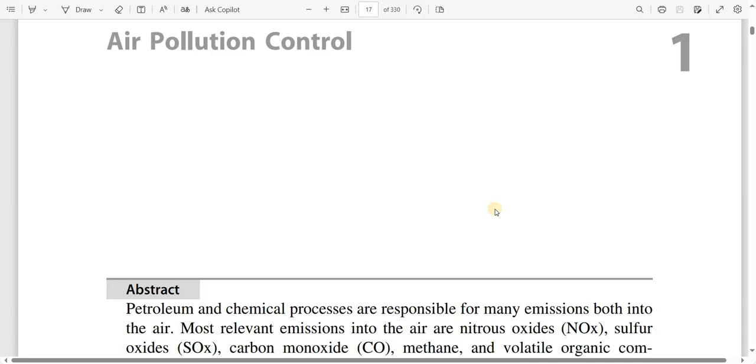From today onwards, we'll be learning about air pollution control - how we can control air pollution in some industries or in chemical plants especially. As a chemical engineer, if we talk about pollution, we would really go to the next level in our life. So we'll be learning air pollution control one page a day, or one topic a day.

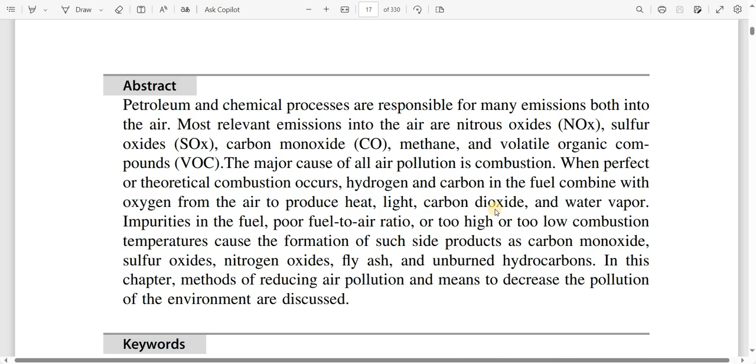Let's see however we take this topic. Let's say abstract: petroleum chemicals. Most of this I'll be just explaining, or reading from this book, so try to understand from that. Petroleum and chemical processes are responsible for many emissions into air.

Most relevant emissions into air are nitrous oxide (NOx), sulfur oxide (SOx), carbon monoxide, methane, and volatile organic compounds (VOC). So most of the emissions that take place are nitrogen based oxide and sulfur based oxide and carbon monoxide, along with methane and volatile organic compounds.

The major cause of all air pollution is combustion. When perfect or theoretical combustion occurs, hydrogen and carbon in the fuel combine with oxygen from the air to produce heat, light, carbon dioxide, and water vapor. Impurities in the fuel, poor fuel to air ratio, and too high or too low combustion temperature cause the formation of side products such as carbon monoxide, sulfur oxides, nitrogen oxides, fly ash, and unburnt hydrocarbons.

In this chapter, methods of reducing air pollution, meaning to decrease pollution of the environment, are discussed. It's a beautiful chapter. Air pollution is the contamination of air by noxious gases and minute particles of solid and liquid matter, particulates, in concentration that endangers health. In this condition, air is contaminated by a foreign substance and the substance themselves.

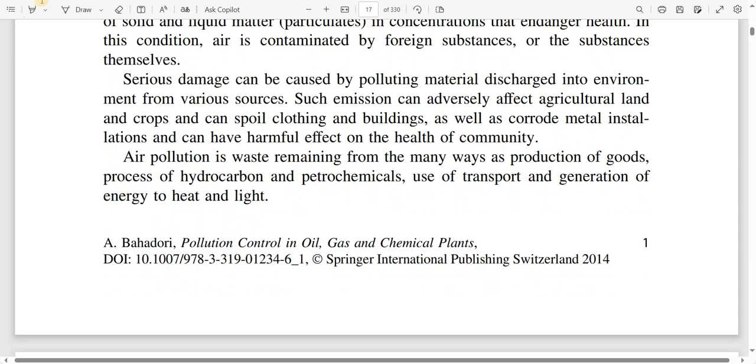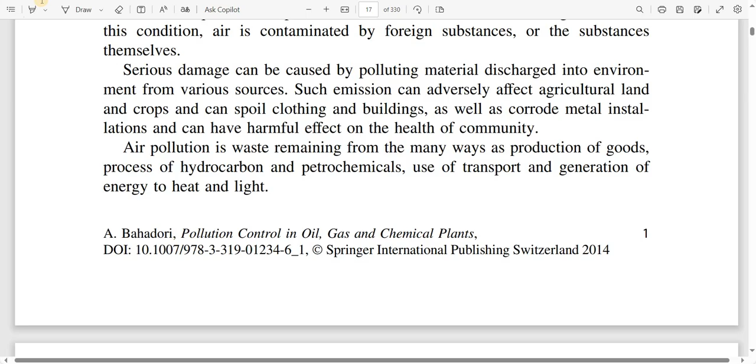Serious damage can be caused by polluting material discharged into the environment from various sources. Such emissions can adversely affect agricultural land and crops, can spoil clothing and buildings, as well as corrode metal installations, and can have harmful effects on the health of the community.

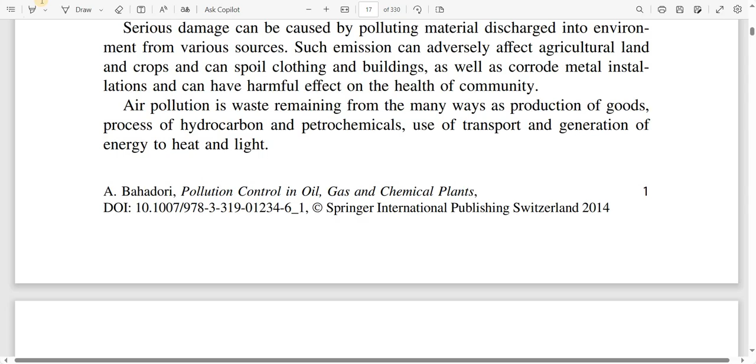Air pollution is waste remaining from many activities such as production of goods, processing of hydrocarbons and petrochemicals, use of transport, and generation of energy for heat and light. Air pollution consists of gaseous, liquid, or solid substances that, when present in sufficient concentration for a sufficient time and under certain conditions, tend to interfere with human comfort, health, or welfare and cause environmental damage. Air pollution causes acid rain, ozone depletion, photochemical smog, and other such phenomena.

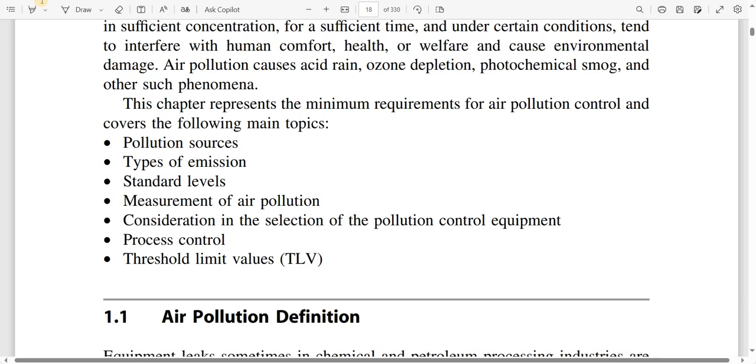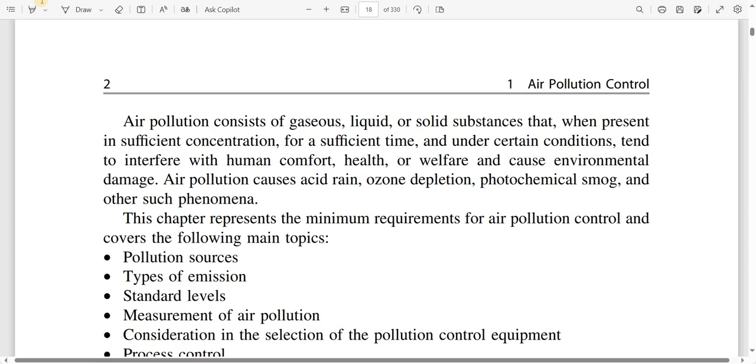This chapter represents the minimum requirements for air pollution control and covers the following topics. So what we have understood is air pollution can affect different parts of a chemical plant, like the health of a human being, or the area in which the air exists, or it can also pollute water that comes as rain, and it can also deplete ozone and cause other photochemical smog and phenomena. These are the main topics we'll be studying here.

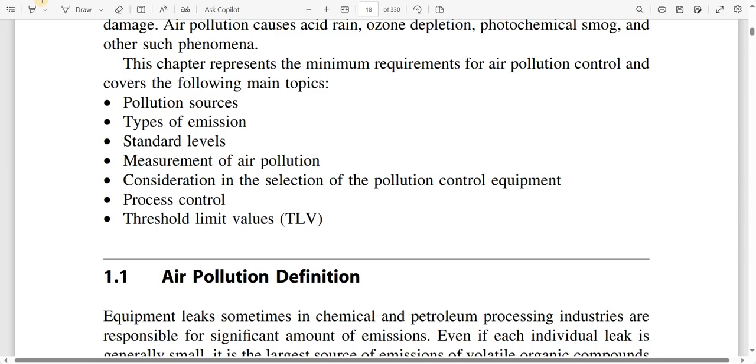They are: pollution sources - what are the sources of pollution; types of emissions; standard levels - what standard levels of a chemical industry should be implemented during installation of plants; measurement of air pollution; consideration in the selection of pollution control equipment; process control; and the last one is threshold limit values, also known as TLV.

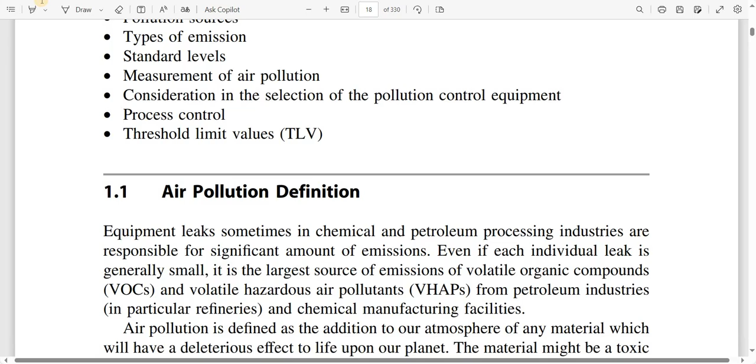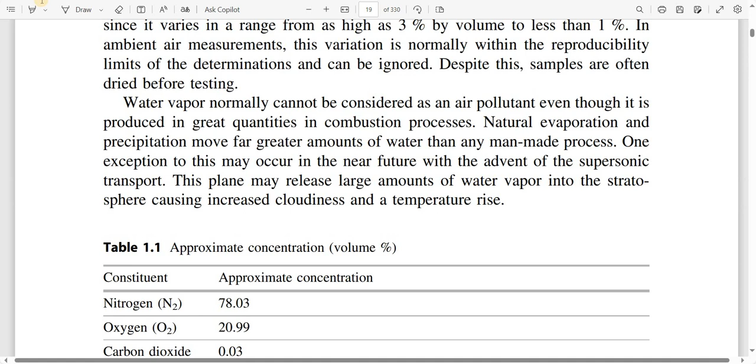So let's today learn about air pollution definition, and see how much we can finish. This concentration level we can do tomorrow also. So this is the final topic for today: air pollution definition. What is air pollution, by the way?

Equipment leaks, sometimes in chemical and petroleum processing industries, are responsible for a significant amount of emission. Even if each individual leak is generally small, it is the largest source of emission of volatile organic compounds (VOC) and volatile hazardous air pollutants (also known as VHAP) from petroleum industries, in particular refineries and chemical manufacturing facilities.

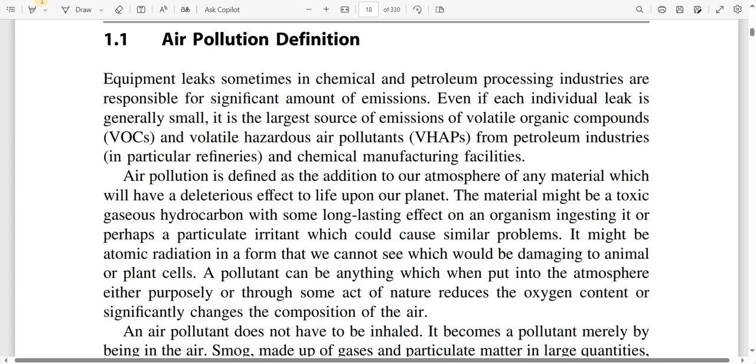Air pollution is defined as the addition to the atmosphere of any material which will have a deleterious effect on life upon our planet. The material might be toxic gaseous hydrocarbon with some long-lasting effect on organisms, ingesting it, or perhaps a particulate irritant which could cause similar problems. It might be atomic radiation, in a form we cannot see, which would be damaging to animal and plant cells. A pollutant can be anything which, when put into the atmosphere, either purposely or through some act of nature, reduces the oxygen content or causes significant changes to the air composition.

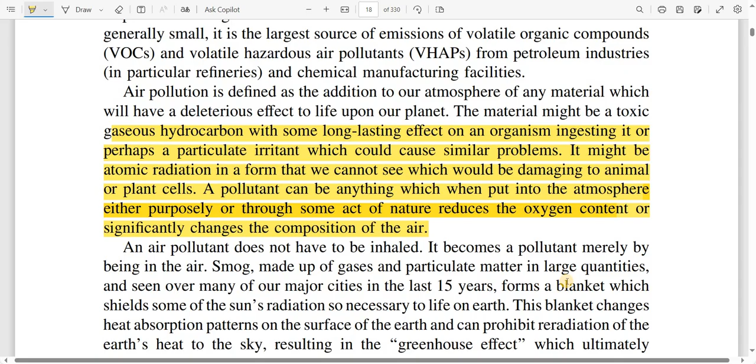So mainly, what is air pollution? It's not just about polluting air. The main thing is it also reduces oxygen as air pollution increases, and many other long-lasting effects can be seen from it. So we can learn so many things about air pollution in this topic.

We also know the most important thing is volatile organic compounds, and air pollution is not only the one we can see through our eyes like dust - that which we cannot see through our eyes is also a very good example of air pollution, volatile hazardous air pollutants.

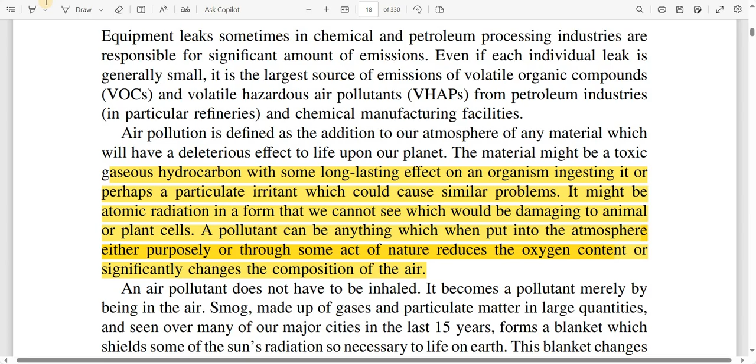Last paragraph: air pollution does not have to be inhaled to say that it's polluted air. It becomes a pollutant merely by being in the air.

Smog made up of gases and particulate matter, in large quantities and seen over many of our major cities in the last 15 years, forms a blanket which shields some of the sun radiation so necessary to life on Earth. This blanket changes heat absorption patterns on the surface of the Earth and can prohibit re-radiation of the Earth's heat to the sky, resulting in a greenhouse effect which ultimately changes the weather and temperature pattern across the entire surface of the planet.

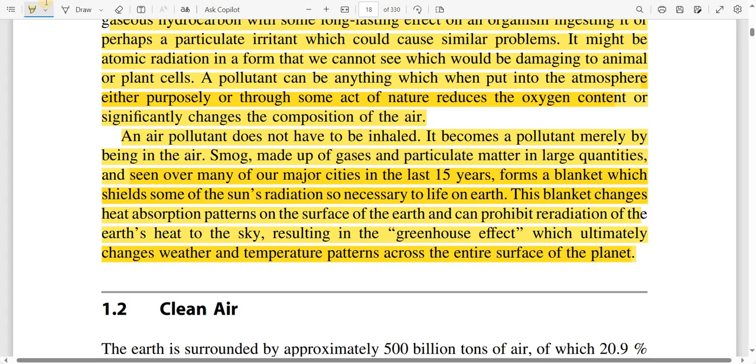So in this way, we know about what air pollution is in this topic. In the next topic we'll be learning about clean air and what standards should be taken care of, and what the sources are and all that. So let's learn about air pollution and how we can control it.